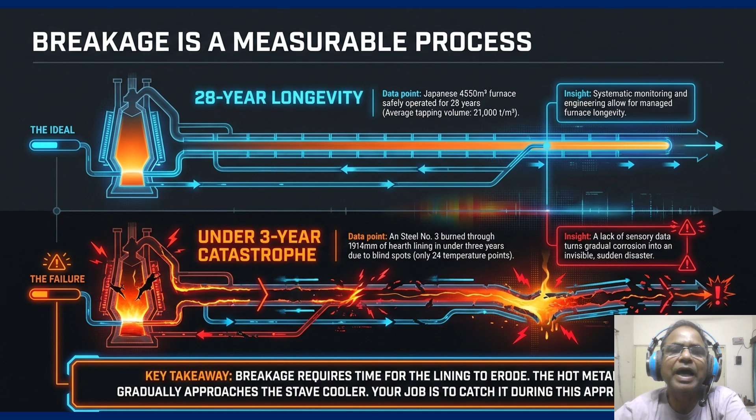Your primary job is to catch the hot metal as it approaches the stave coolers before it turns into an invisible sudden disaster. Coming to our anatomy of the threat, that is the elephant foot. To prevent such damage, you must understand the elephant foot, a garlic-shaped cavity that forms at the hearth's weakest point, typically 1 to 2 meters above the tap hole center line.

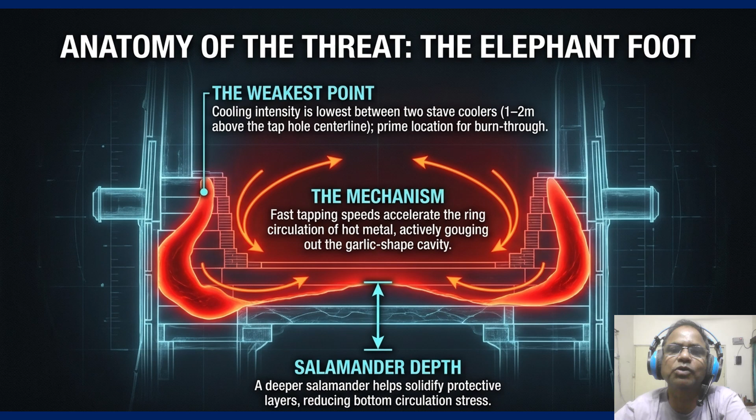This happens because fast tapping speed accelerates the ring circulation of the hot metal, which actively creates a problem around the corner of the refractory. So maintaining a proper salamander depth is crucial, as it helps solidify protective layers and reduce the stress of that bottom circulation. Coming to our hidden intruders like lead and zinc.

We always have chemical enemies in the burden. We know zinc creates a pan-pot effect. It penetrates the brick lining and expands, which can actually lift the furnace shell by 150 to 160 mm and destroy the bottom seal. Lead is the cooling killer. It's heavy, sinks below the hot metal and accumulates around cooling pipes, causing deformation and thermal breakage.

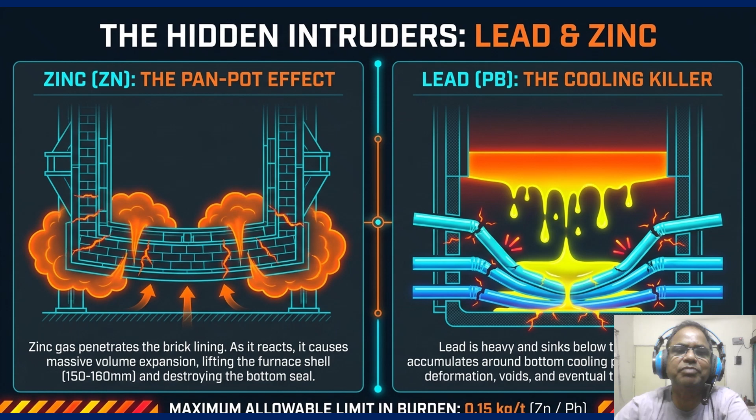We must strictly adhere to the maximum allowable limit in the burden, that is 0.15 kg per ton of hot metal for both combined. This is one of the very important pieces of information that we must stick to in every aspect of the blast furnace. Coming to the stave cooler thermal boundary. Think of the stave cooler as your shield and water flow as your primary defense.

A breach typically occurs at the seams between two stave coolers where cooling intensity is lowest. If water flow is insufficient or blocked, the hot metal remains fluid and penetrates these gaps, burning through the shell. Our goal is to maintain enough cooling intensity to solidify that permeable iron before it ever reaches the boundary. So we must look into all those precautionary measures.

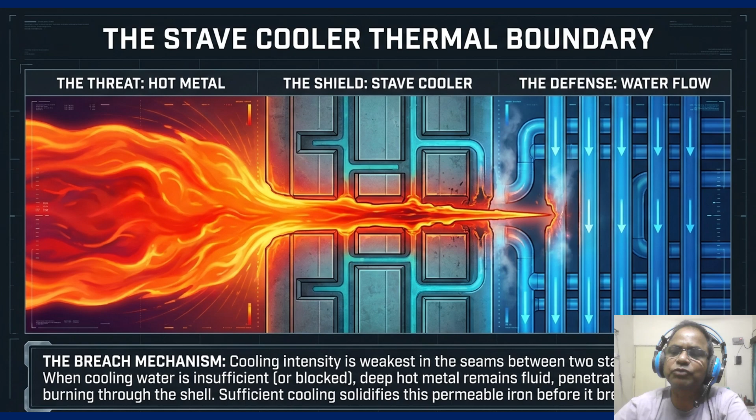When you see a spike in the heat flux intensity, specifically exceeding 15,000 kcal per square meter per hour, local erosion is becoming severe. Here is the critical rule. If the water temperature difference rises at a rate of 1 degree centigrade every minute, a structural failure is imminent. So you must begin evacuation immediately.

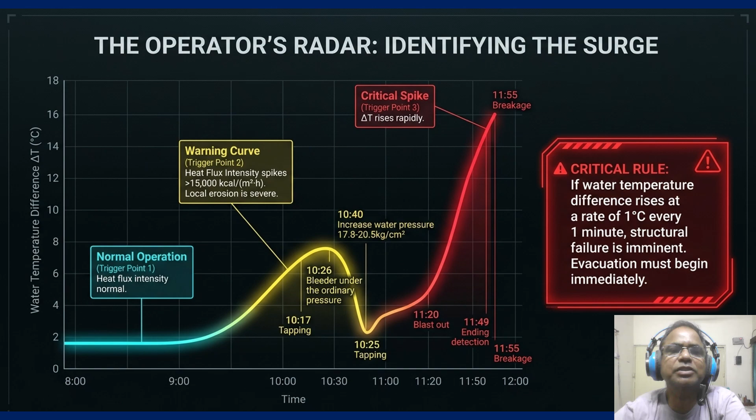Coming to our diagnostic matrix, as you can see, the furnace state. This matrix helps you categorize the furnace health. In normal operation, keep the foundation dry and maintain tapping speed. In a warning state, you will see smoke from the crack and rising heat flux. This is the time to shift the pressure and monitor closely.

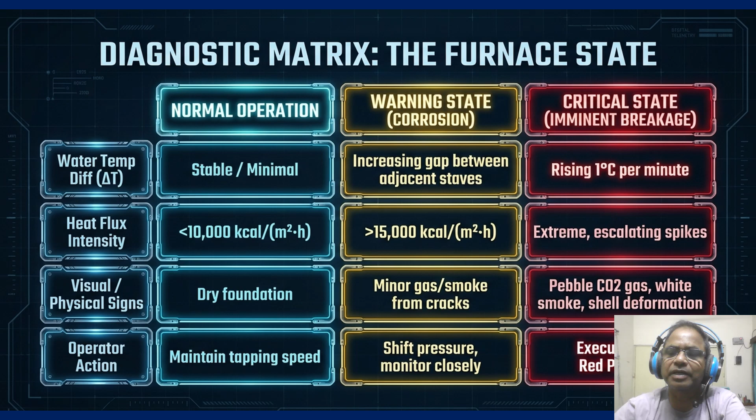If you hit the critical state, characterized by white smoke, shell deformation, and that 1 degree centigrade per minute rise, you must stop everything and execute the code red protocol. What that code red protocol is, we'll discuss later on. Coming to the daily deliverables regarding proactive defenses. Prevention happens every shift through three actions.

First is tapping speed control. Do not tap too fast or you will create elephant foot erosion. Second, fettling operations. We routinely add titanium to the burden because titanium compounds solidify and patch eroded gaps in the hearth. Finally, harmful elements tracking, that is monitoring zinc and lead daily. If they breach limits, we must mandate alkali discharge operations immediately.

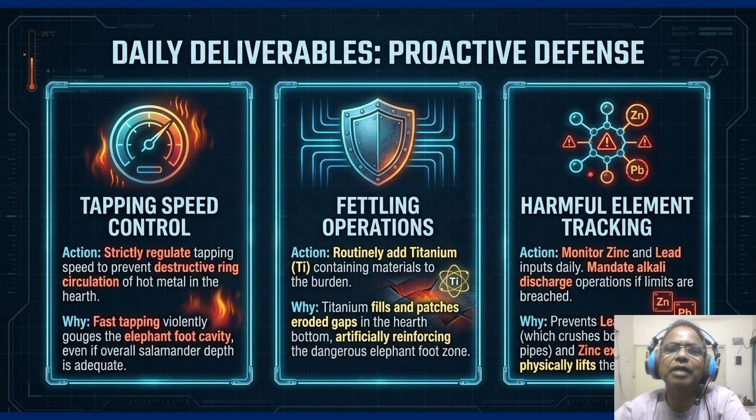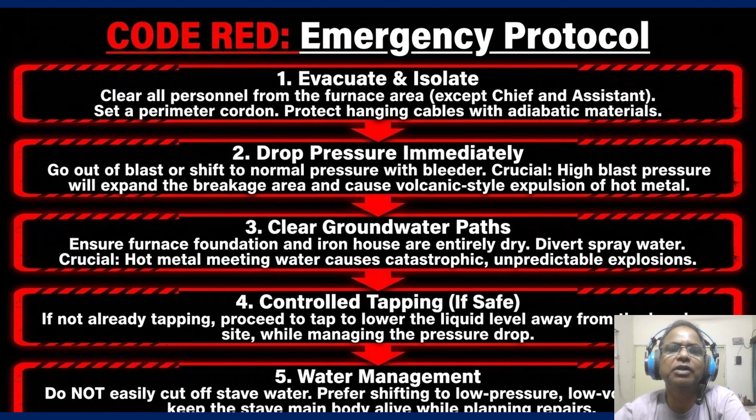Third is clear groundwater paths. Ensure the foundation is dry. Water meeting hot metal causes catastrophic explosions. Number 4: Controlled tapping. If safe, continue tapping to lower the liquid level away from the breach. Number 5: Water management. Do not simply cut off stave water. Shift to low pressure flow to keep the stave body alive while we plan repairs.